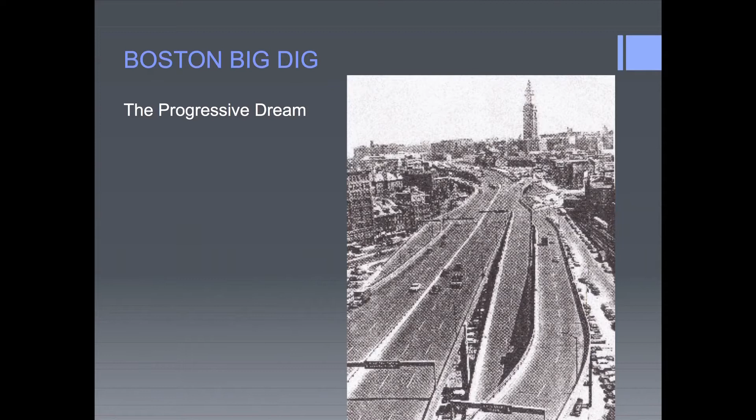The second one is the Boston Big Dig. That was about, I think, a 25 to 35-year delivery process. Very expensive, but that was obviously the progressive dream in the 60s: elevated highways, no traffic lights, you're never interrupted, you flow through the city at high speed. That was really what it looked like before they started the Big Dig, and that was the aspiration, and in fact what they delivered.

You might say, wow, that is pretty fantastic, because you are getting rid of all that traffic infrastructure and seem to be delivering some sort of proper urban realm. When you look at the Google map, it looks even more seductive, because you think you've got this fantastic chain of parks.

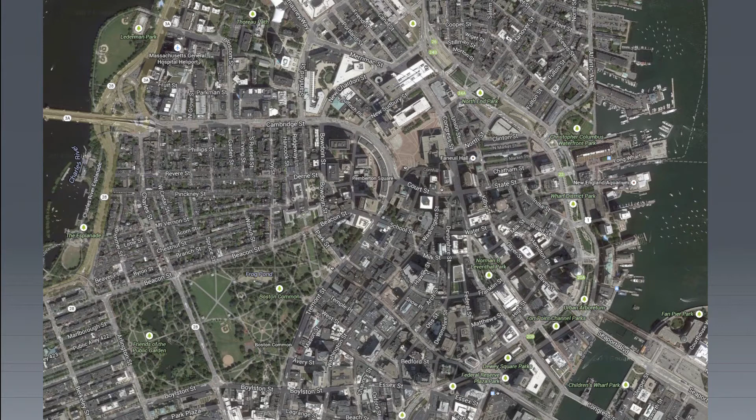All the way along their sort of ribbon of green through the city. But the problem is they never really considered how to integrate this into the city. So if you ever stand and look at this beautiful chain of parks, all the people are here on the pavements either side. You've got highways either side that separate the park, tunnels with massive ramps and severance everywhere. So what you have is these beautiful parks that nobody ever uses.

It's really, I think, a huge disappointment. This project could have delivered so much more if they'd thought about people using it and integrating it, stitching it into the city, rather than just laying out a string of parks that don't really connect to the city. And of course, what happened was that they moved the problem elsewhere.

This is called the South Bay Junction. They buried the highway through the city but just pushed it out here with no thought to the communities that actually live around here and potentially would have developed. These would have been development zones if they'd actually brought the highway up at surface level and dispersed it through the city. But you'll never get development happening with that sort of atmosphere around you.

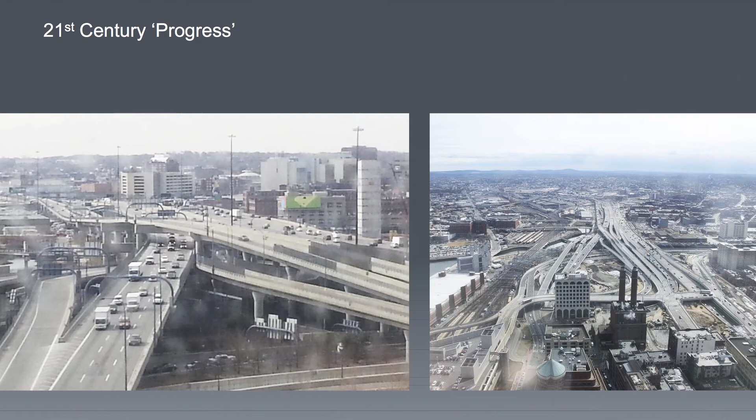The last project is CROSSRAIL, and I'm sure most of you know here what it's about. You may not know it's taken 95 years to get through to when it's delivered. It will be 95 years. It was first on the planning books in 1930.

It was on the planning books in 1940. It was in Abercrombie's plan. It came forward in the 60s. Then it got dumped because of Beeching. It came forward again in the 80s. It failed in Parliament because nobody could really agree this was a good idea. So it finally succeeded in Parliament in 2008 and will be finished in 2018.

The CROSSRAIL bill had a very limited scope, so it looked specifically at the technical project within the red line. That's what the bill says CROSSRAIL has to deliver. It's purely track and station, but it doesn't even go 1 meter beyond the front door of the station. So it's very contained, and it completely ignored the urban regeneration effects that CROSSRAIL could potentially deliver.

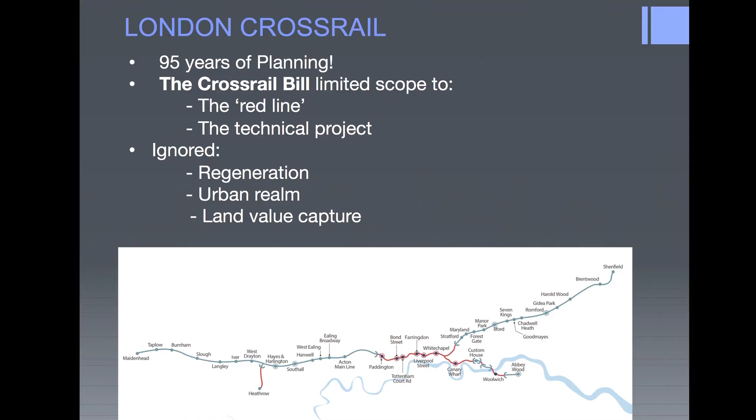It completely ignored urban realm. So what it said to the developers, the promoters of the project, was, if you dig up the road, you have to put it back again as it is now. It didn't say you had to put it back any better or different, just slap some tarmac back and that is fine. It completely ignored land value capture. So the lucky developers who happen to be around the stations are going to get rich as Croesus, but nobody else is particularly going to benefit from that uplift in value.

Huge mistake all around. However, unlike Boston, where they kind of ignored those issues, there was an amazing and unusual sort of collaboration that took place where all the stakeholders said, this just isn't good enough. We're going to be, this is a once-in-a-lifetime project. These streets, these corners of London are probably not going to be dug up again for 100 or 150 years.

So we need to address how all the stations are integrated, and we need to think about what opportunities arise at every station and every place that's being dug up by the project, and to think about what we can do to improve the local areas.

And as a result, over 30 public realm schemes have actually been commissioned and paid for. The design schemes have been paid for by a combination of Crossrail finding a bit of money, TfL finding a bit of money, but mostly funded by Crossrail.

Crossrail really were very proactive about this, and they went out and said, fine, we're going to set up an urban integration program, and we're going to talk to all the people involved at any particular place. There'll be a team, a steering group, and we'll meet and decide what the project should be. We'll hire consultants and get projects that we all agree on, so that TfL had to be happy, but also the boroughs, Westminster, whoever it was, the landowners, and English Heritage, whoever was involved.

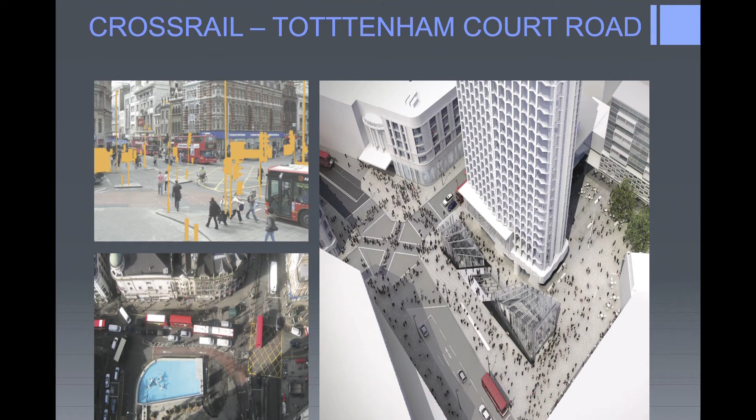That's the Gillespies scheme, which will have an all-red crossing here, but it's considering all the desire lines, so people will be able to come from shopping in Oxford Street and filter through down to Covent Garden. All the tourists that come to London go to Covent Garden and Oxford Street if they're under a certain age, but at the moment they tend to go by tube, and actually this is a very walkable distance.

So Tottenham Court Road will be beautified. Outer London as well - so Ilford Station, for example, a 150-year-old station.

This is a classic example. The red line was very limited, the Crossrail bill, so they didn't have to rebuild the station. And the council was very upset that they wouldn't get a new station, but they do get a fabulous public realm scheme.

So the urban integration program took over and said, well, forget the station, but we'll do fabulous stuff outside. So instead of coming out onto a very narrow pavement - the opening to the station, there's one there and one somewhere here - you come out onto no more than about 4 or 5 feet. It's so narrow, and then there are hundreds of buses that come by. Unfortunately this is the middle of the day, but in rush hour there's something like 16 or 18 bus routes that all come here, all lining up, and it's just a miserable place.

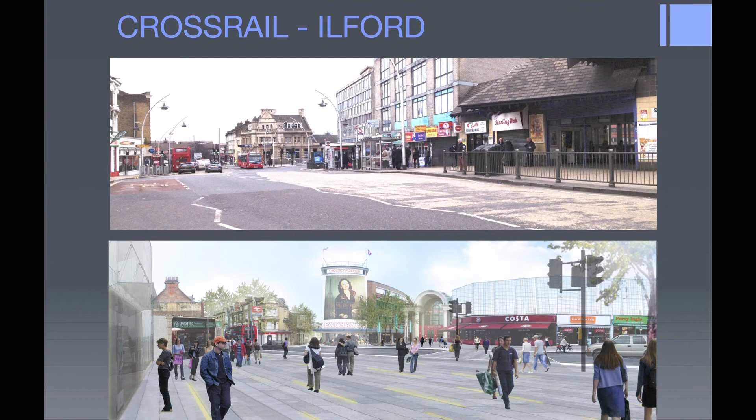So they've widened the pavement. TfL agreed that they could lose capacity on the highway, and as a result you've got sensible pavement widths and crossings and a nice environment.

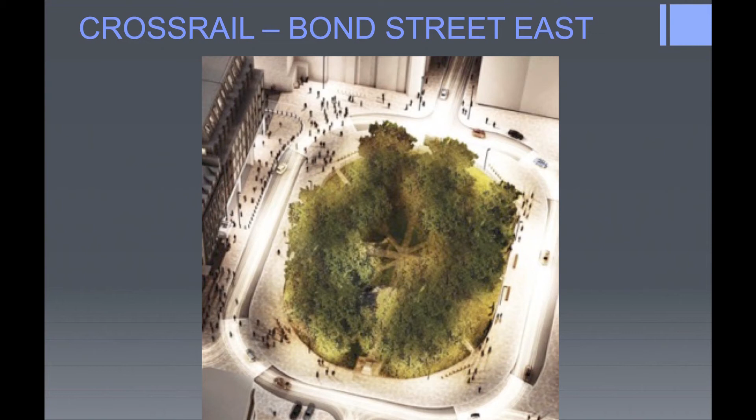This is Bond Street East, which is Hanover Square if you recognise it - one of those islands you couldn't get to in the past. They were very isolated. The CROSSRAIL station is in that corner. What they're doing is saying, let's make this all pedestrian, permeable and easy. I think the railings are coming down, so it will be part of the city and very accessible - you'll actually be able to get into it. High quality materials and lighting will all be paid for out of that 90 million. This is a project Space Syntax worked on.

This is Bond Street West, which is completely different issues because it's in a very tight street, near South Molton Street, Davies Street, those back streets behind Oxford Street. Very tight - so how do you manage people there? Space Syntax had their input. So again, you're going to get a fabulous - not a public square, but really nice streets to walk on.

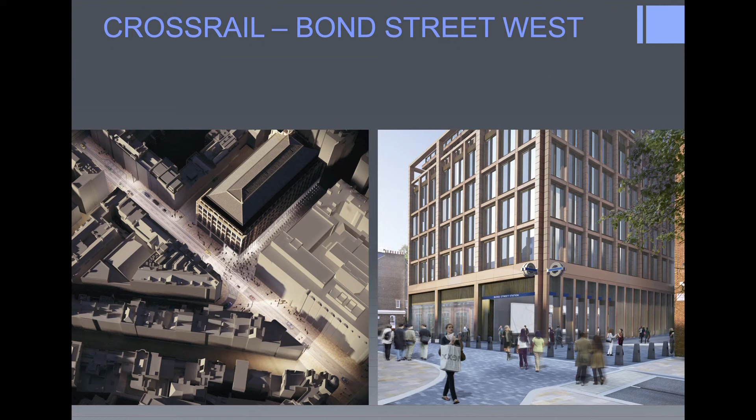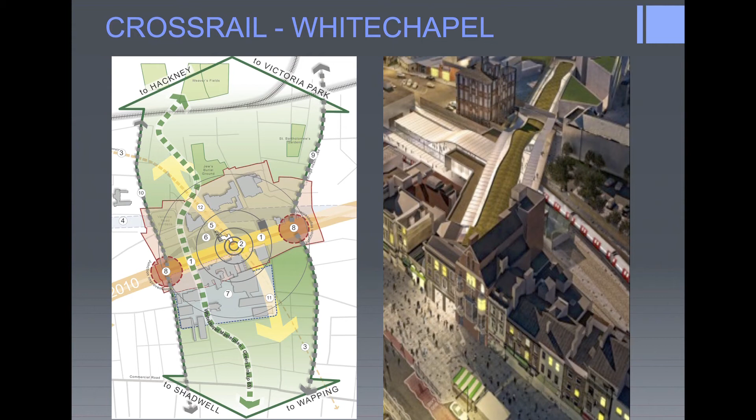Finally, to finish up - I've been thinking about this, and I wrote an article in Transport Times a few months back. I think the problem is that mega projects and infrastructure projects have a red line around them that's deliberately drawn very tight, because the thinking is you reduce the money. We don't want to pay for anything we don't really need to pay for.

But actually what we should be thinking about is a zone of influence. This is just a diagrammatic thing, but imagine if that was a building with a little station coming out, and you say, okay, what are we going to do when we built it? We'll repair that tiny bit of pavement over there. But if you had a zone of influence to consider, you might think, well, what better pedestrian crossings do we need all over here? What do we need over here? You think of the area as a whole.

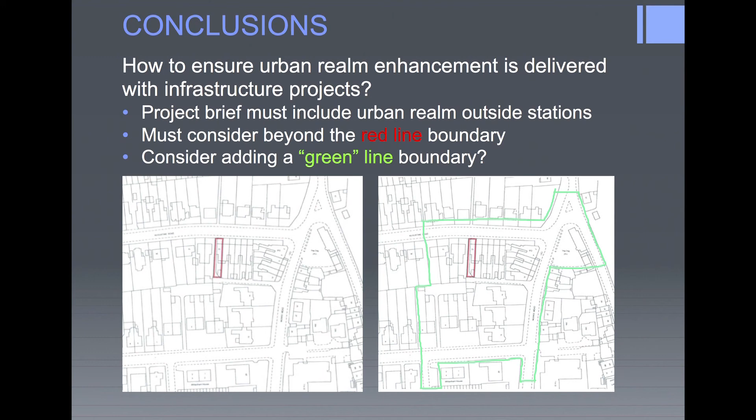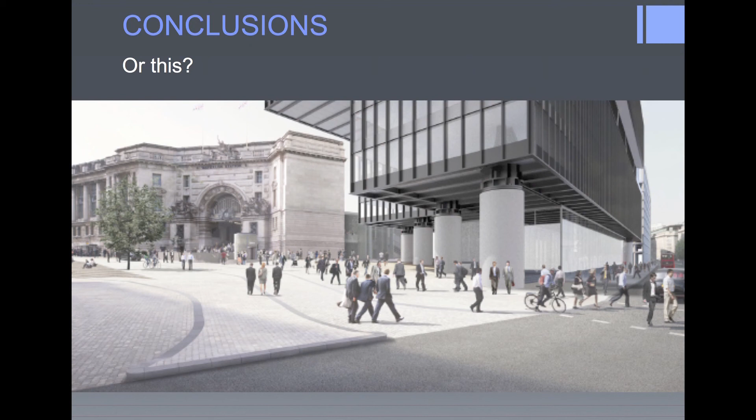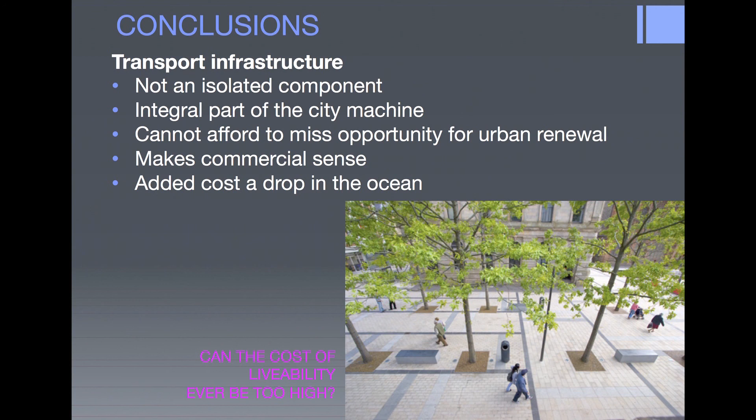So my final conclusions - I think the main thing is transport projects are not an isolated piece of infrastructure. They are absolutely an integral part of the city, so you have to think of them that way, how they can be integrated into the machine. You can't afford to miss that opportunity - once in a lifetime, once in 100 years - of digging up the street and rearranging things to suit what's happening today, as opposed to what happened 100 years ago. And we all know it makes commercial sense that property values rise. At the end of the day, the extra bit of money is such a minuscule drop in the ocean - I should have worked out what percentage it is, but if you think of 90 million on 18 billion, it's absolutely nothing.

That's it. And there is actually an article on this, a slightly fleshed out article in Cities Today, which should be coming out any minute.

That's me. Is that 10 minutes? That was 14 minutes. Oh dear, it's crazy.